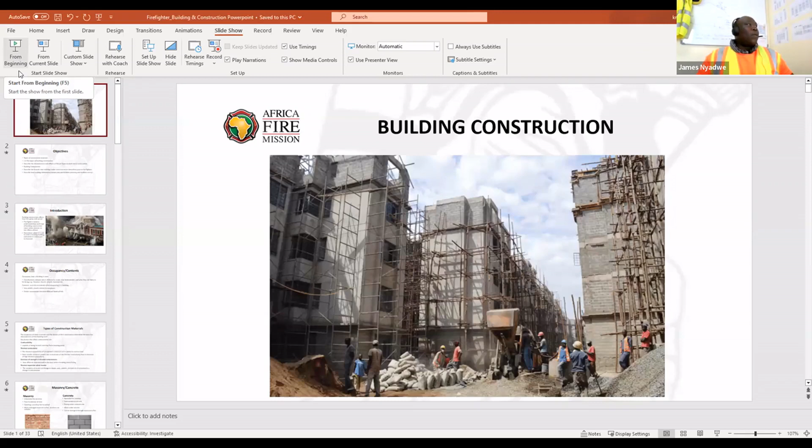Now it's a bit of a stretched out one, but we'll just work on it slow and go through it. If you have any questions, please wait till the end, then you can ask, but I'll try and run through it as efficiently as I can.

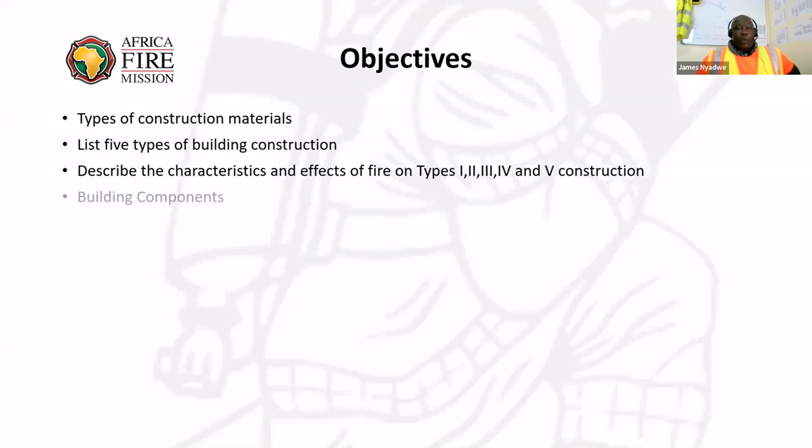So we're talking about building construction in relation to the fire service. We're going to look at types of construction materials, the 5 types of building construction, and describe the effects of fire on each of these 5 types. We'll look at building components and how they affect us as firefighters, describe the hazards that buildings under construction or demolition can pose to firefighters, and then look at how building construction factors into pre-incident planning and incident size-up. So here we go.

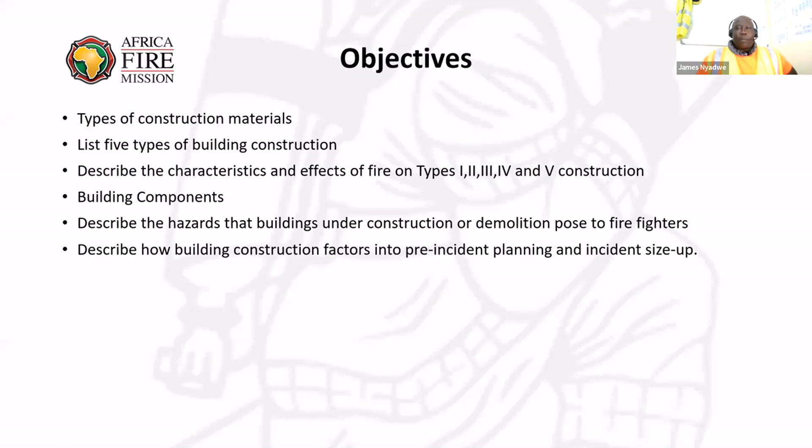So we look at a couple of things, starting with occupancy. Occupancy means how the building is used - it may be classified as a hospital, a church, a school, a factory, etc. That gives you an estimate of the number of people in there. If it's a hospital, you'd know there's a lot more people. If it's a church, depending on the day, you'd have a certain number of people. This should also be considered when responding to a fire.

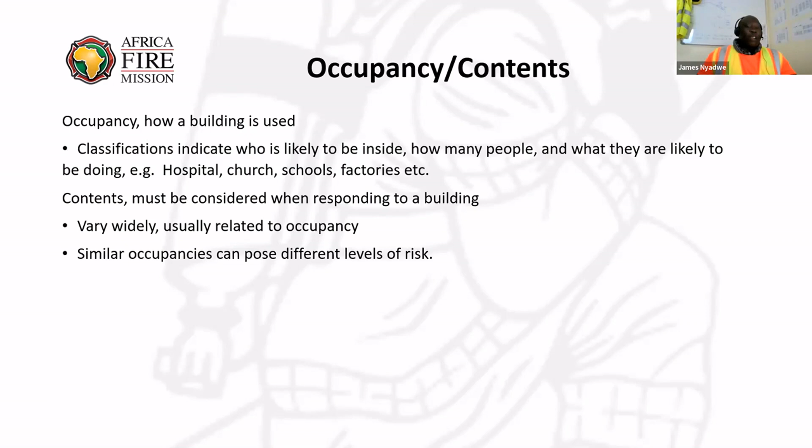The contents also relate to the classification. If it's a hospital, you'll have oxygen tanks, beds, a dining area, and other things. If it's a school, you'll have desks. If it's a factory, you'll have heavy machinery. This is very relevant to us when going to a fire - it's good to know the occupancy classification so we come prepared, and it might help in selecting what tools you need for the task ahead. Similar occupancies can also pose different levels of risk, and we'll look at that as we go through the presentation.

So then, types of construction materials. These materials determine the basic fire characteristics of the building itself. Some of the things we're going to look at: combustibility, which pretty much means the capability of being burned - how fast does it catch fire and how easily does it burn.

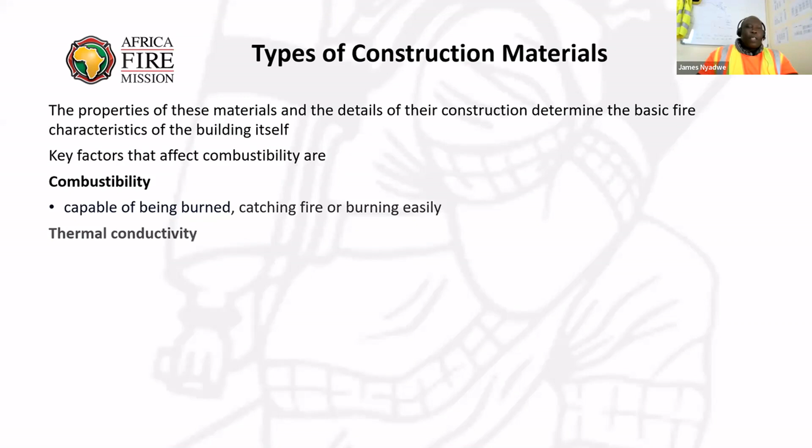Then there's thermal conductivity - this is a measure of the material's ability to conduct heat. Heat transfer occurs at a lower rate in materials of low thermal conductivity than in materials of higher thermal conductivity. Those are just some terms there, but we'll discuss more of them as we go through the presentation.

So, decrease of strength at elevated temperatures - this talks about how different materials will hold up in heat before breaking down or failing. This is important because if it's a roof, a door, or a wall, it gives us a rough idea of how much time we have in that area before we need to evacuate.

Then thermal expansion when heated - this is the tendency of matter to change its shape, area, volume, or density in response to a change in temperature. If the fire is really hot, we may have a problem in that area. So all these things are just a few things we should know about construction materials.

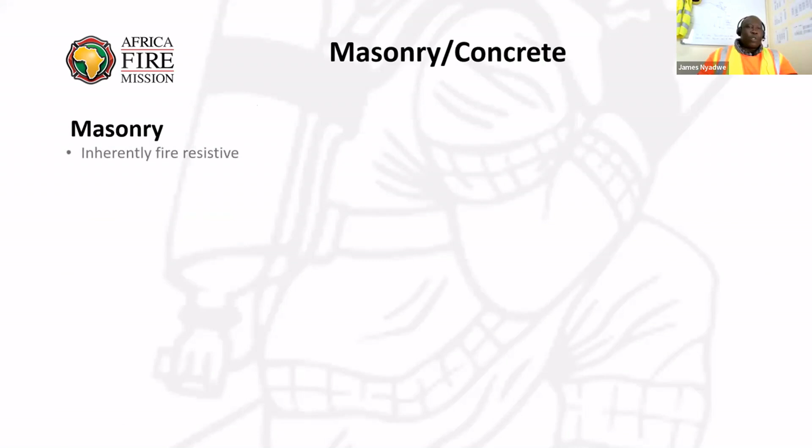So let's look at the different ones we have. We'll look at masonry versus concrete and do some comparisons. Masonry is inherently fire resistive - that means it doesn't burn that easily.

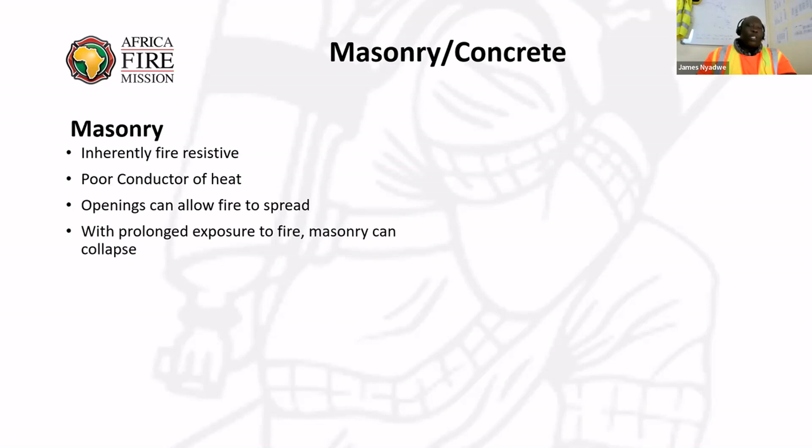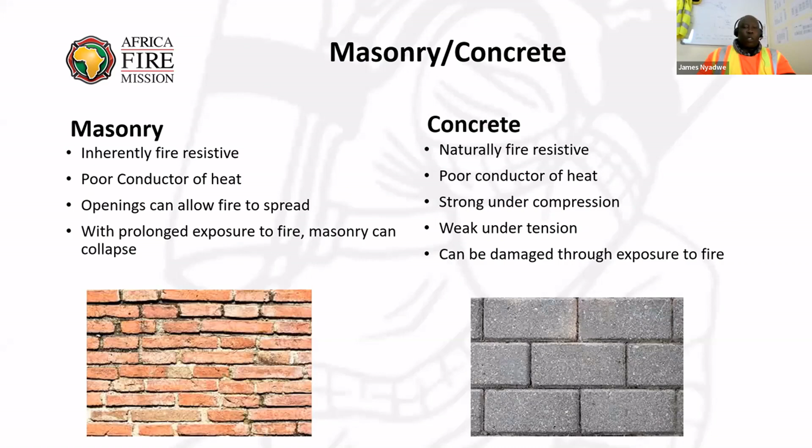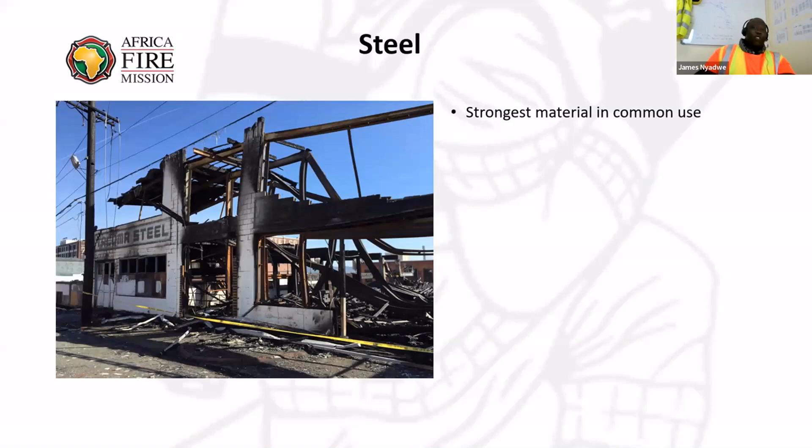So moving along, we go to steel. As you can see from the picture, the steel will bend. It's the strongest material in common use out there, strong in both compression and tension. It will rust if exposed to air and moisture, like out here where I am. There's a big problem with rust, so a lot of things get to rust. Vehicles will rust, pieces of equipment will rust if they're left out.

Not fire resistive, that means it will burn. It's a very good conductor of heat, meaning the steel can transfer heat from one area to a different area of the building that is not burning. It expands and loses its strength when heated. Any sign of bending, sagging, or stretching indicates immediate risk of failure. So if you're in a fire in a building that had a lot of steel structures, and you see it starting to sag or bend, then you know chances are it's about to go, or it's in the process of failing.

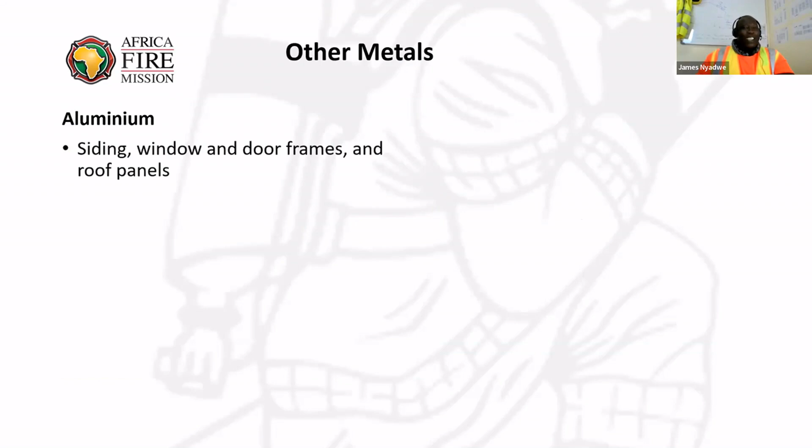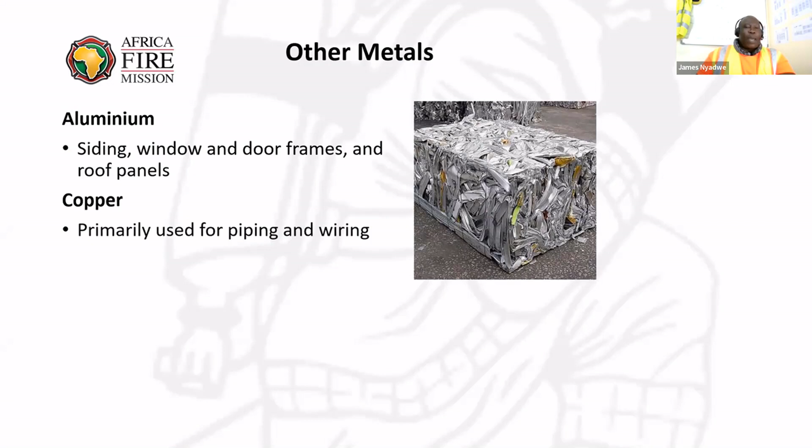So other metals that we have: aluminum. Our American friends will say aluminum, but for today in Africa, we'll say aluminium. This could be like siding for windows, door frames, roof panels, and just generally a pile of scrap aluminum. Copper is also used a lot for piping and wiring. And then we have zinc, used as a protective coating for metals, like on taps and other fittings, you'll have zinc on there. So these are some of the other metals you'll have in our regular building constructions.

So we look at glass and gypsum board. All right, so we'll start with glass: non-combustible, but not fire resistive. If it's ordinary, untreated glass, it will break when exposed to a flame. So that's all there is pretty much to do with glass, not too much more we can go into that.

But gypsum board is a good insulator with limited combustibility. If it's got paper in it, it will burn, but the gypsum board itself will not. So it's often used in some buildings or constructions as a fire stop, but prolonged exposure to fire will cause failure. So none of these items we've talked about are really 100% fireproof.

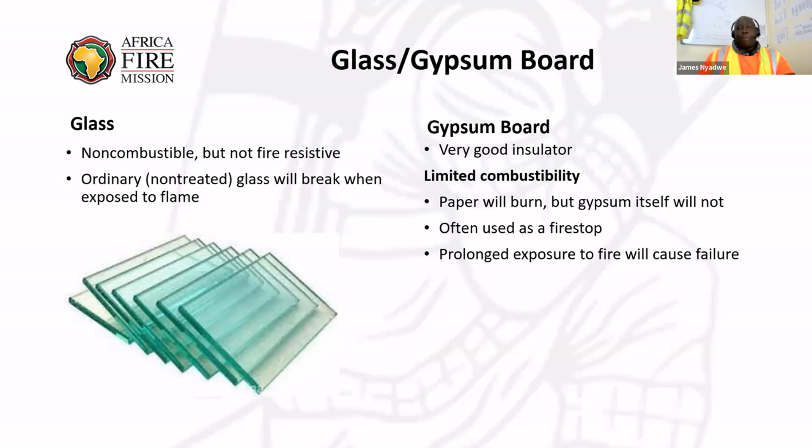At certain points they may fail, right? So you might ask yourself, what's a fire stop? A fire stop is something that is designed to maintain the fire resistance rating of a wall or floor assembly, something designed to impede the spread of fire or smoke. So it kind of slows it down. As you see down there with the gypsum board, we have the normal one, the fireproof board, moisture proof, and waterproof. So they come in different styles or types.

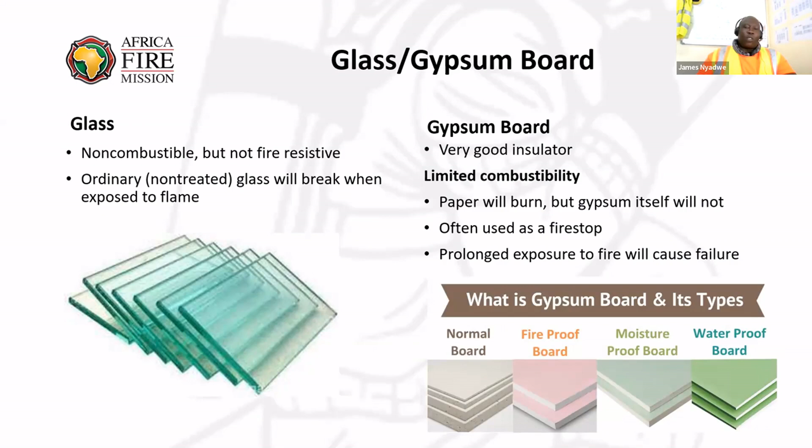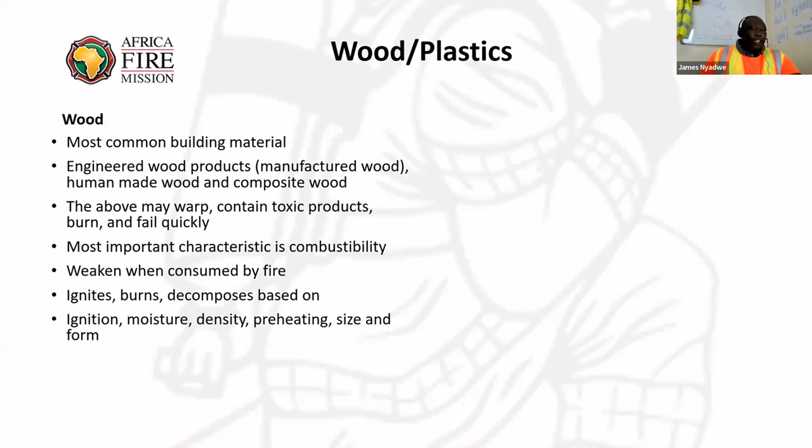Wood and plastics. Wood is very common the world over. It could be manufactured wood, human-made wood, or composite wood. It may warp, it may contain toxic products, and it burns and fails really quickly. The most important characteristic is combustibility, weakened when consumed by fire. So it ignites, burns, and decomposes based on moisture, density, preheating, size, or form. High temperatures decrease strength via pyrolysis.

Pyrolysis is wood that is subjected to rapid thermal decomposition in the absence of oxygen. That's what that term means. So then we look at plastics. They're rarely used for structural support. Combustibility varies depending on the type, but most plastics will release dense or toxic smoke when they burn. We have different kinds, called thermoplastic materials, which will melt or drip. Thermoplastic materials means these ones can be softened through heating before being processed, then left to cool and harden.

So that's what we call thermoplastics. Once cooled, they show no changes in their chemical properties, meaning they can be remelted and reused several times.

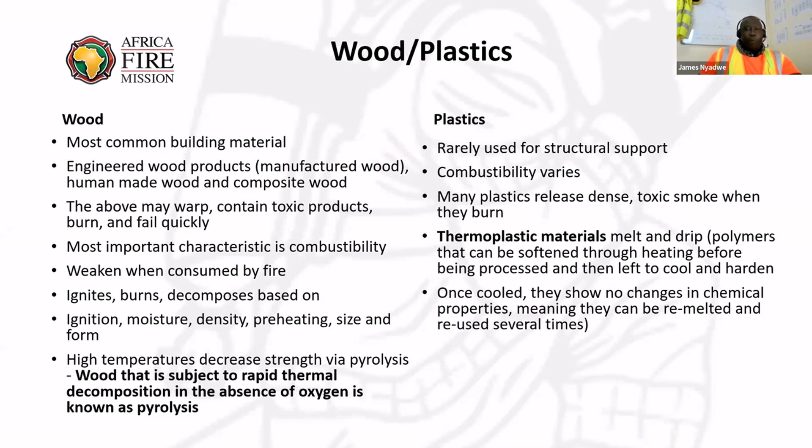So that's thermoplastics. Thermoset materials, those ones lose strength—they will not melt. They are synthetic materials that strengthen when heated. So once they're heated, you cannot remold it again, or reheat it and transform it again. So those are the two different kinds of plastic that we'd have.

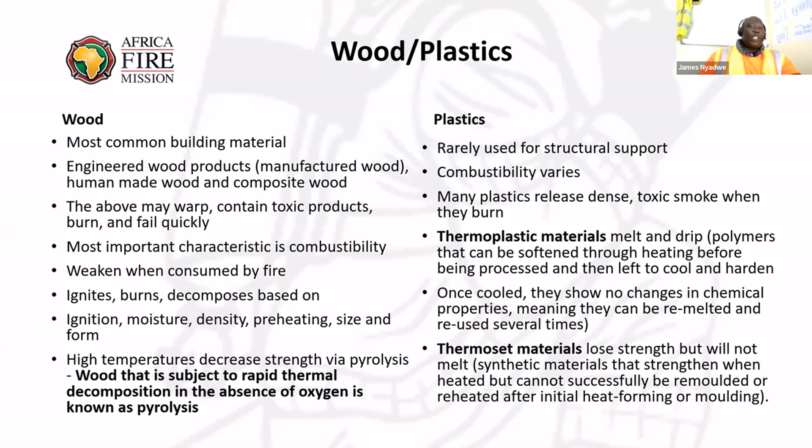And some of the newer building materials would have these as part of the components of our building. So now let's look at the 5 types of construction.

Now, for me, this was quite a surprise because I didn't actually realize there were different types of construction. I always say a house was a house, a building is a building, but I guess you always learn something new. So there's type 1.

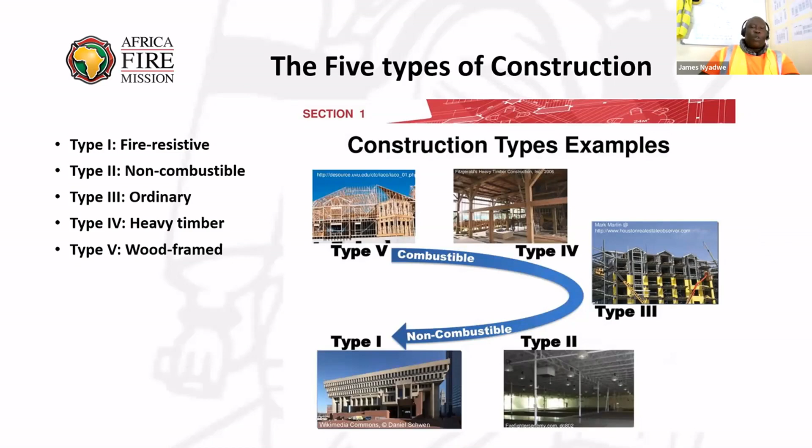So there are 5 types. Type 1 is fire resistive. Type 2, non-combustible. Type 3 is ordinary. Type 4 is heavy timber. Type 5 is wood framed. We're going to look at each one and see what their characteristics are, going from type 1 through to type 5.

So type 1, fire resistive. If a building is rated as type 1 fire resistive, then all the structural components in it must be non-combustible. That means they cannot burn easily.

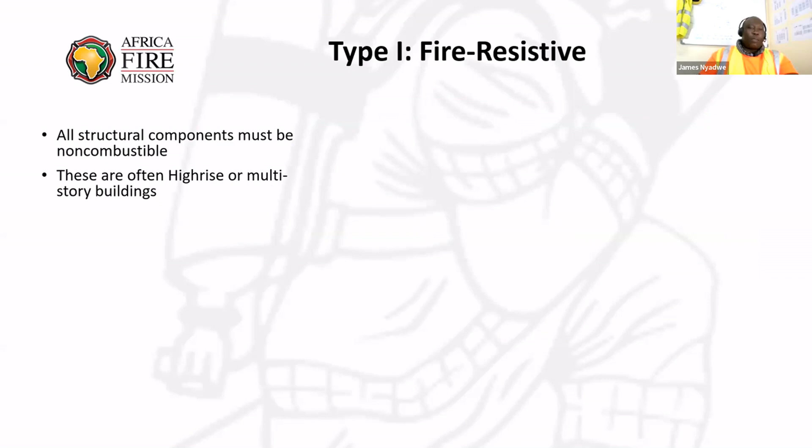They're often used for high-rise buildings or multi-storied buildings, and they should be able to withstand fire for between 2 to 4 hours. That at least gives you some time to get in there, evacuate, or attack the fire before it actually starts to break down.

The building materials should not provide fuel for a fire, because imagine if it was a high-rise or multi-storied building and all the materials provided fuel—the structure would fail very quickly. If it has steel framing, it must be protected. And fires of this type can be very hot and extremely hard to ventilate.

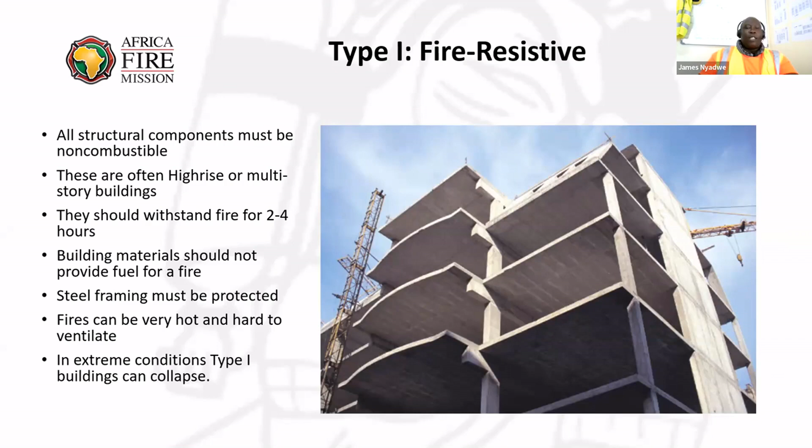So that's just an example of a high-rise building, and you see it's mostly a lot of concrete, so that doesn't burn easily—that's fire resistive type 1. Also, in extreme conditions, this kind of building may collapse, and we've seen it happen in different parts of the world. Really strong building, but because of excessive heat or extreme conditions, the building will collapse. So that's something also to keep in mind.

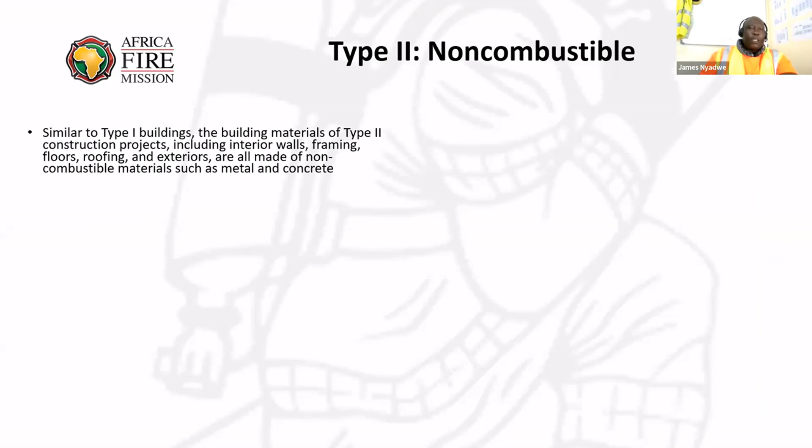So we look at type 2, non-combustible. Similar to type 1, but the building materials of type 2, including interior walls, framing, and roof, are all made up of non-combustible materials such as metal or concrete. Now, although these materials are labeled as non-combustible, they offer less protection than type 1.

So type 1 would be the cream. If we're looking at vehicles, if type 1 was the Mercedes, then this one is our second level. They're usually not coated in fire resistant materials, so a spreading fire would likely do more damage. Buildings that fall into this type 2 category would be shopping malls, newer schools, and big box stores like Naivas, Nakumatt, or Tuskys.

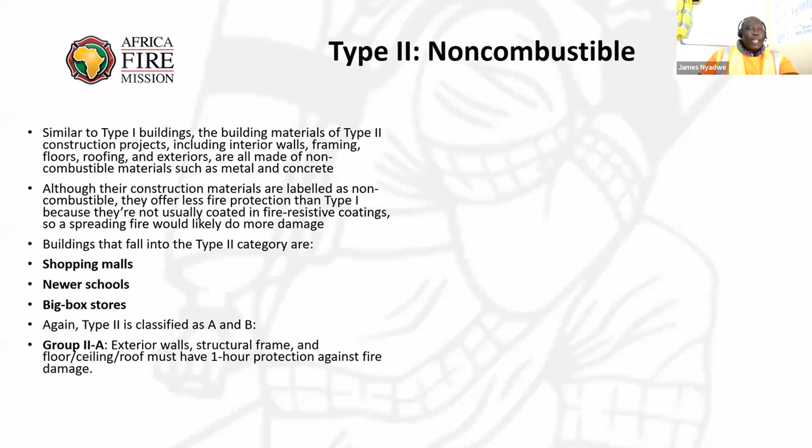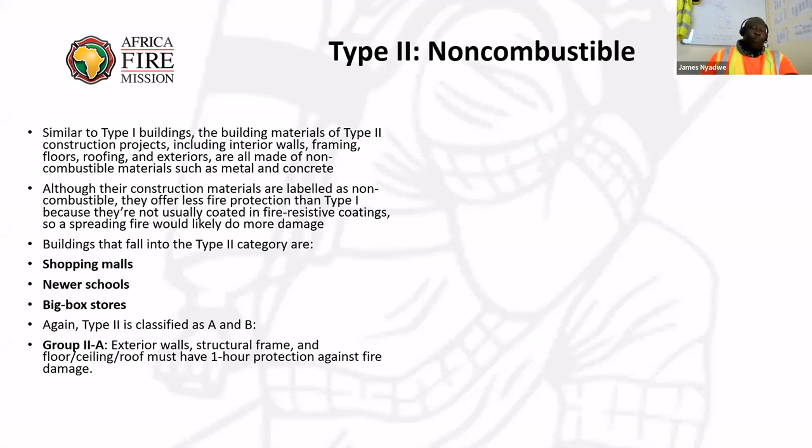But remember, this type 2 has 2 classifications, A and B. In type 2A, the exterior walls, structural frame, floor, ceiling, and roof must have at least 1 hour protection against fire damage—enough to get people out and give us a little edge over the fire.

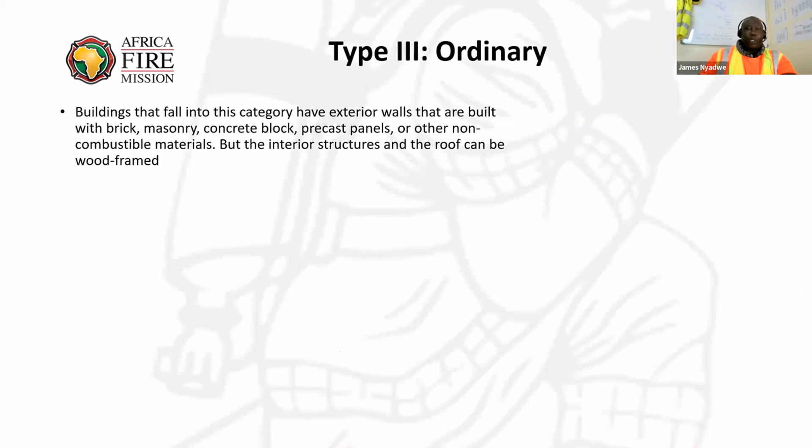So moving on to type 3, ordinary. Buildings that fall into this category have walls built with brick, masonry, concrete block, precast panels, or other non-combustible materials, but the interior structures can also be wood framed. The main goal of type 3 is, in case of fire, to contain it within the exterior walls of the building and prevent it from spreading to nearby buildings.

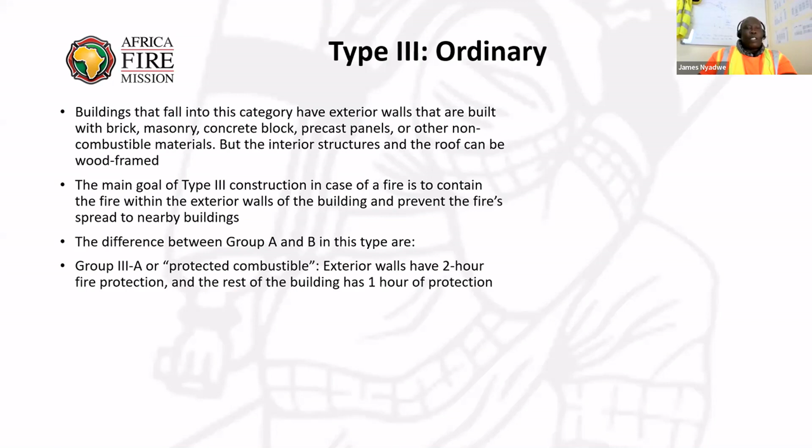Again, this one has 2 groups, A and B. In type 3A, protected combustible, the exterior walls have 2 hour fire protection, and the rest of the building has 1 hour protection.

Type B, the exterior walls have 2 hour protection, and the rest of the building has very little resistance.

The construction options for this type of building, type 3, are more varied than type 1 and 2. But then again, you still have less fire protection. So it's up to us as firefighters to know the kind of buildings we have in our city or in our towns. That way it prepares us, even mentally, about what to expect when you go to fight a fire in this sort of structure.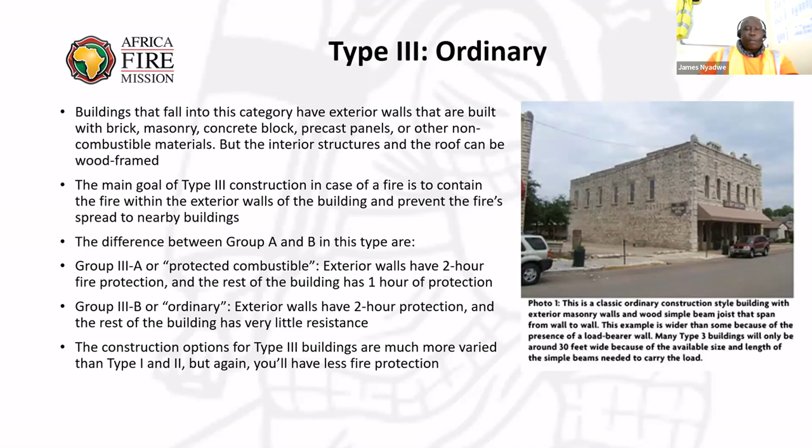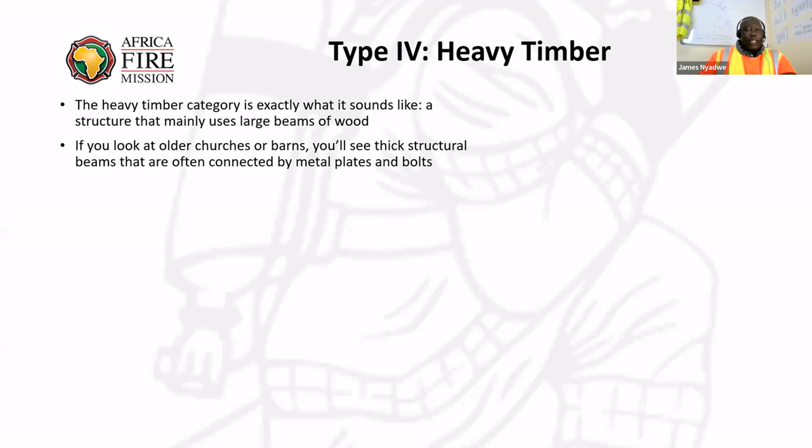So let's look at type 4, heavy timber or heavy lumber, as they would say in other countries. So this is a building that mainly uses large beams of wood. Different countries have log cabins - Canada, America, certain parts of the world - made entirely of big trunks of trees. Now if you look at older buildings, barns or churches, you might see the big structural beams in there, and they're usually connected by metal plates, or they have thick bolts that go through. The columns, beams, or girders will also be at least 8 inches thick to support the building's loads. And heavy planks for the roof and floors might at least be 6 inches thick.

So these type 4 buildings also have non-combustible exterior walls and interior elements, but they're not divided into A and B like the type 3s.

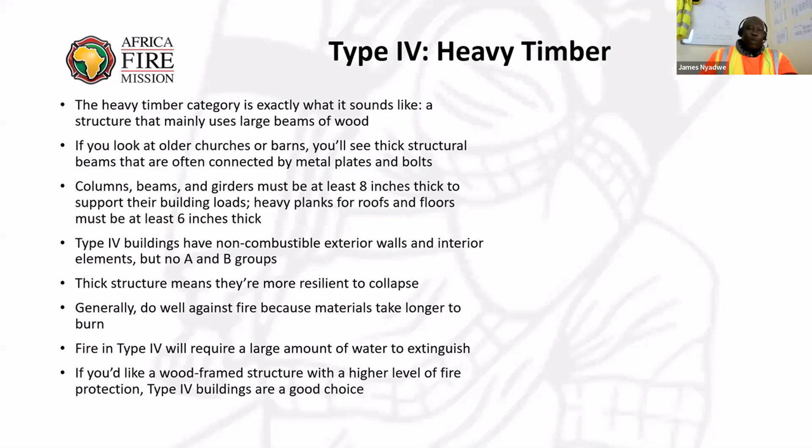Thick structure means they're more resilient to collapse, means they're more steady. But again, they do well against fire, because the materials take longer to burn - it's like trying to burn a whole tree trunk, it takes a while before it catches fire. But again, you will need a large amount of water to extinguish that fire. So it's just good to know what you have in your area. Like we always say, be prepared, and then you won't be too surprised when you get called out to an incident or to a fire.

So this type of building is becoming popular now, because a lot of people love the natural style of buildings. A lot of people are going back to building with wood or lumber, heavy timber for their buildings. Makes it look nice, makes it look like a greenhouse sort of thing. So you'll see a lot more of that coming through.

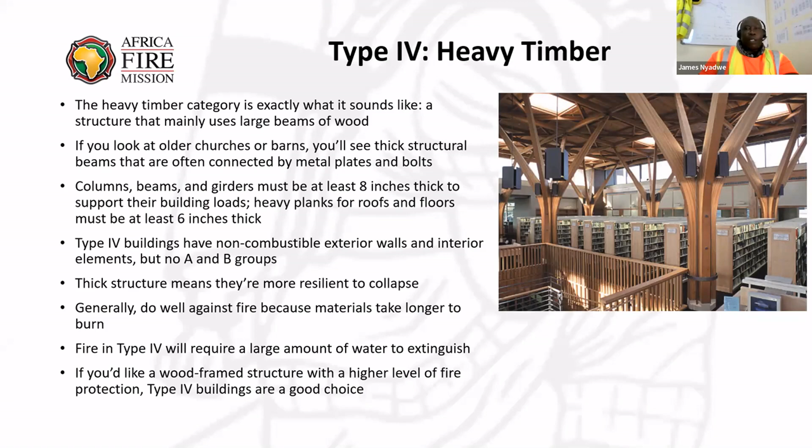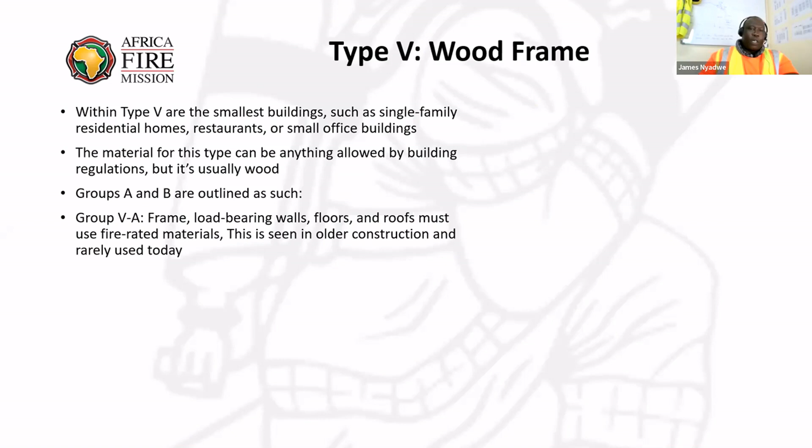Then we look at type 5, wood frames. They're the smallest buildings, such as single family residential homes, restaurants, or even small office buildings. The material for this type can be anything allowed by building regulations, but it's usually wood. This one also has 2 groups, A and B. Group 5A is a frame - load-bearing floors, walls, and roofs must use fire-rated materials. This is seen in older construction, but it's rarely done today. And type B of this building has no required fire resistance rating for any of the building elements.

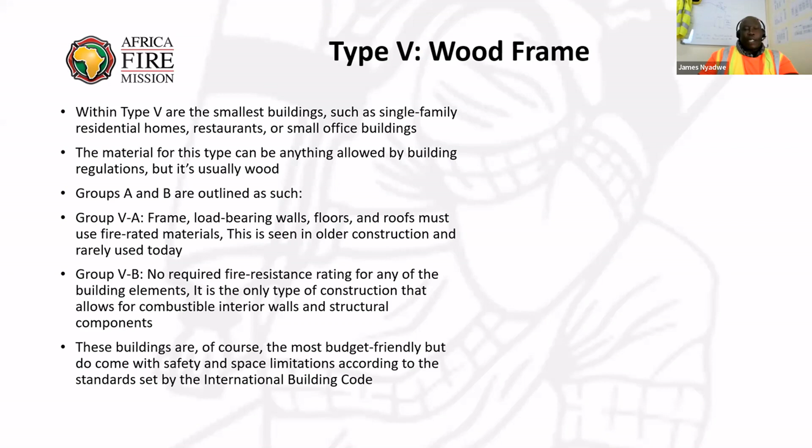It's the only type of construction that allows for combustible interior walls and structural components. Again, these buildings are most budget friendly, but they do come with safety and space limitations, according to the standards set by the International Building Code. So as you see, they're easy to make, they're affordable, but in a fire it would be very easy for it to collapse, because these are what you'd find in a lot of informal settlements, a lot of the wood structures you'd find there. So that's again just something for us to note.

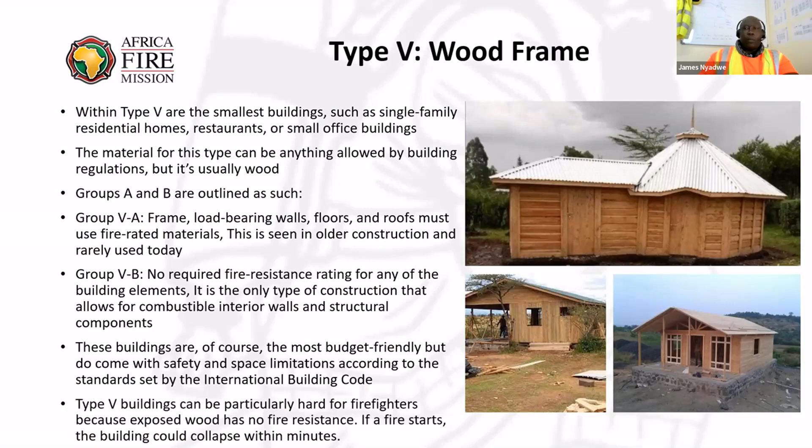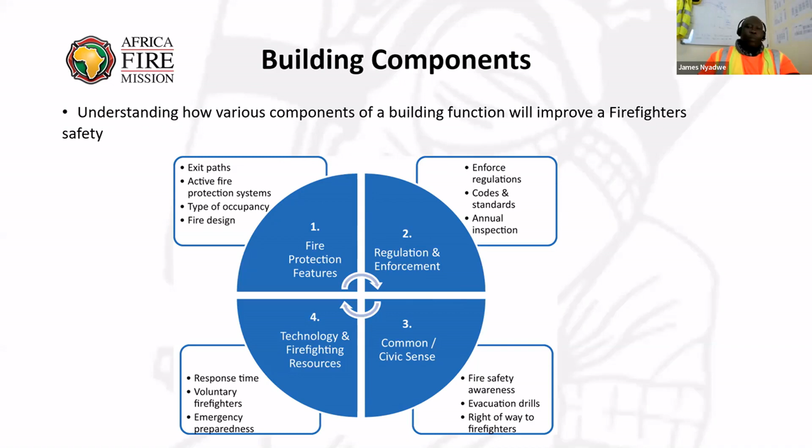Because if you went to a building that had a fire and everybody knew to evacuate and shut the doors based on what you've told them, it would help you when you arrive. By the time you get there, they tell you we've already evacuated the building, everybody's accounted for, we've shut all the doors, we've done A, B, C, D. It does make your work easier. So that's just something we can think about as we go forward.

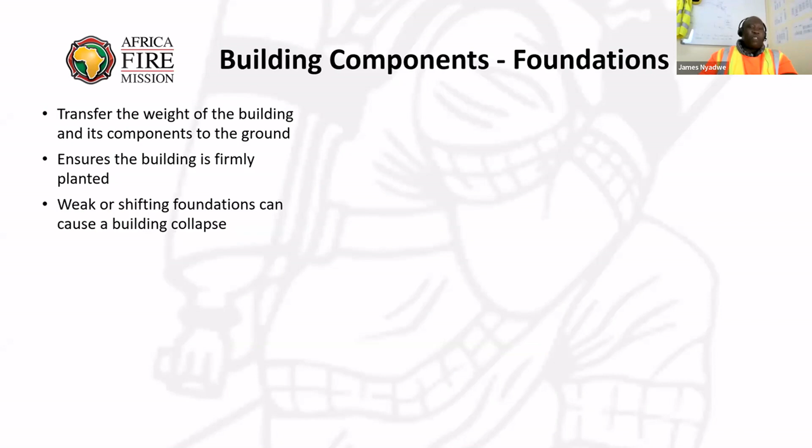So let's look at foundations. Foundations transfer the weight of the building and its components to the ground, ensuring the building is firmly planted. We all know a weak or shifting foundation can cause a building collapse, and unfortunately many firefighters have been killed as a result of this happening.

So we need to understand the buildings in which we fight our fires. The knowledge of building construction starts with understanding the loads, forces and the materials. As you look at a building while driving down your daily commute, coming from home, look around and see what's going on around you, because this early detection is also very good.

As it shows there, we have different pictures of people doing construction, and also as a result of foundations collapsing. This becomes a really difficult situation for any firefighter, and you really don't want to be in a situation like that.

So we become part of the solution, not part of the problem. We help the public understand why they need to do certain things. But then again, that all doesn't fall on us - there are different government agencies also tasked with doing the same things and making sure things are being done up to code. But that's a story for another day.

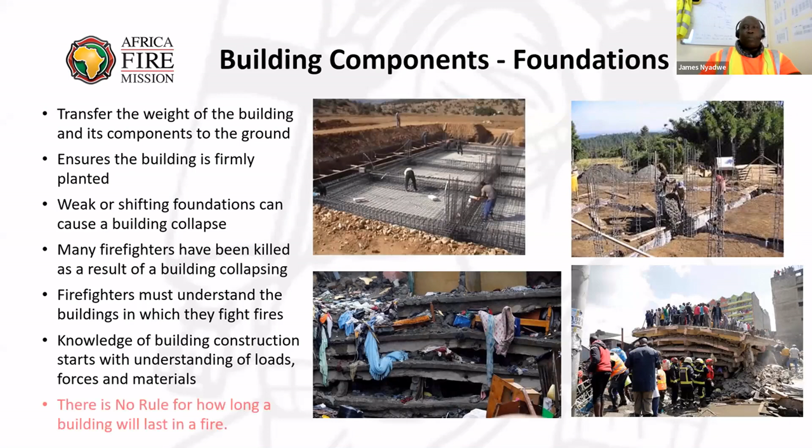So we look at wood supported floors. Heavy timber floors can contain a fire for an hour or more. Conventional wood flooring burns readily - pretty much like a matchstick - and can fail in as little as 20 minutes. In our informal settlements, this is the situation we might be dealing with, the conventional wooden flooring. There's also modern lightweight wood I-beams and trusses.

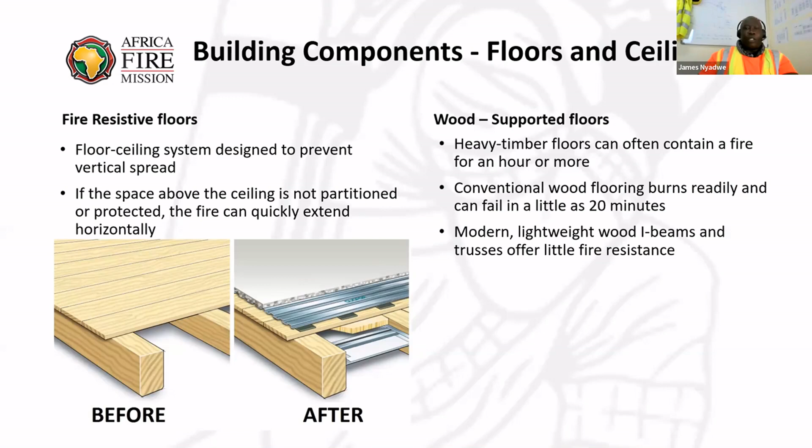There are 3 designs we'll look at for this purpose. We have pitched roofs, curved roofs, and flat roofs. So you have your flat roof, your pitched roof, and your curved roof. Those are the different types of roofs we have, and they behave very differently in fires.

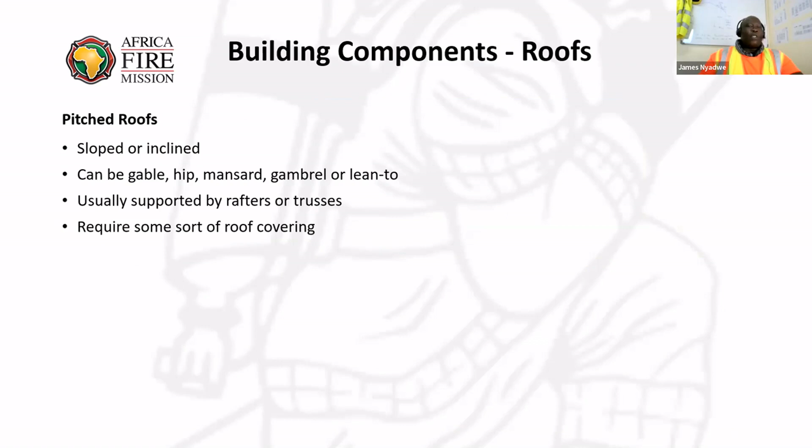Pitched roofs may be sloped or inclined. They can be gable, hip, or different styles - those are pretty much the different names for styles of pitched roofs. They're usually supported by rafters or trusses, and require some sort of roof covering like iron sheets, tiles, etc.

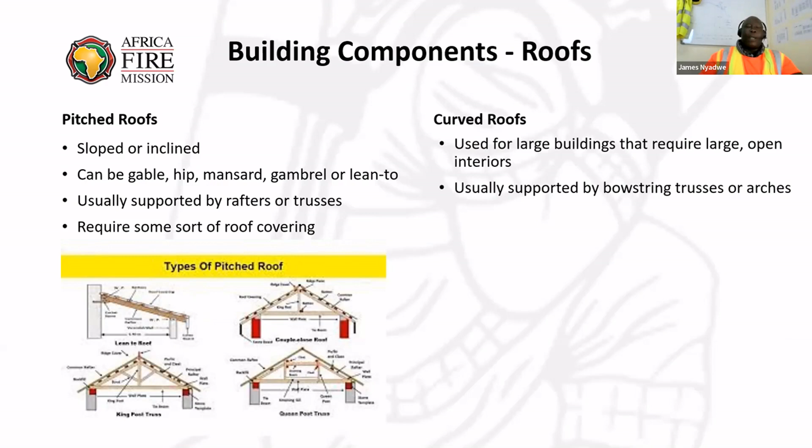Curved roofs are used for large buildings that require large open interiors - warehouses, factories, automotive showrooms, things like that. So that's your curved roof. And then on the other side, we have pitched roofs, like residential houses and that sort of thing.

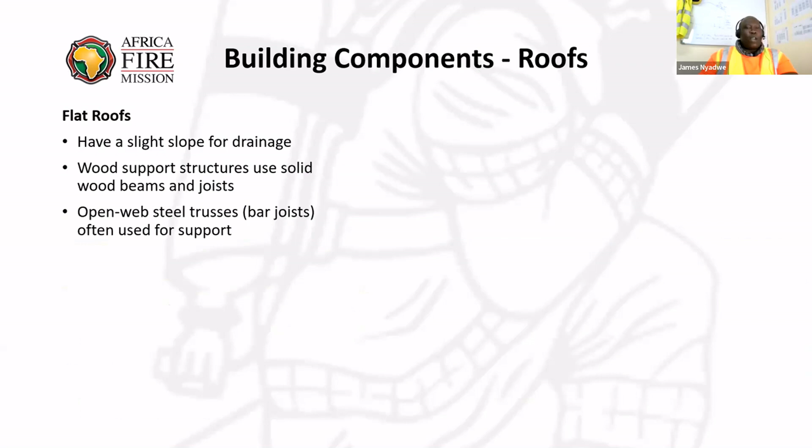Still on roofs - flat roofs will have a slight slope for drainage. Wood support structures are solid, with wood beams or joists. If they have open web steel trusses, these are often used for support. And most of the covering is highly combustible. So that would be a flat roof.

Ventilation may involve cutting through many layers of roofing to ventilate the fire. So as we said before, the truss is the framework that supports something like the roof - even a bridge's framework is called a truss. It could be a steel beam, a wooden beam, that sort of thing, but they call it a truss.

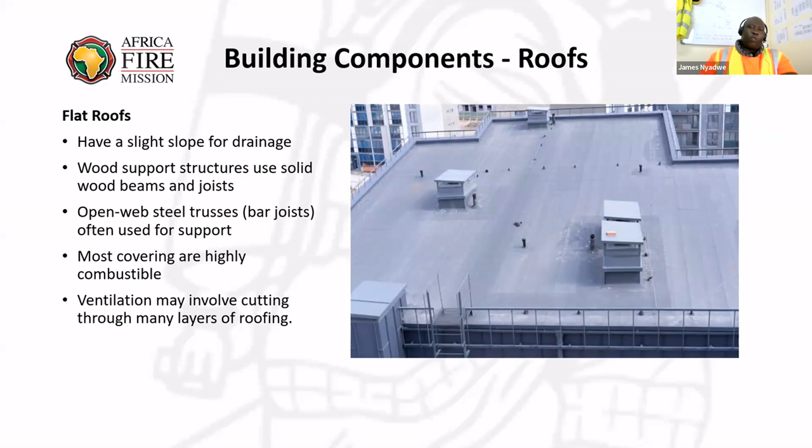So look at our trusses. Triangular geometry creates a strong, rigid structure, usually prefabricated wood or steel. They fall into three types - I just picked these three, but there are a lot more different styles. There's the parallel chord, the pitched chord, and the bowstring.

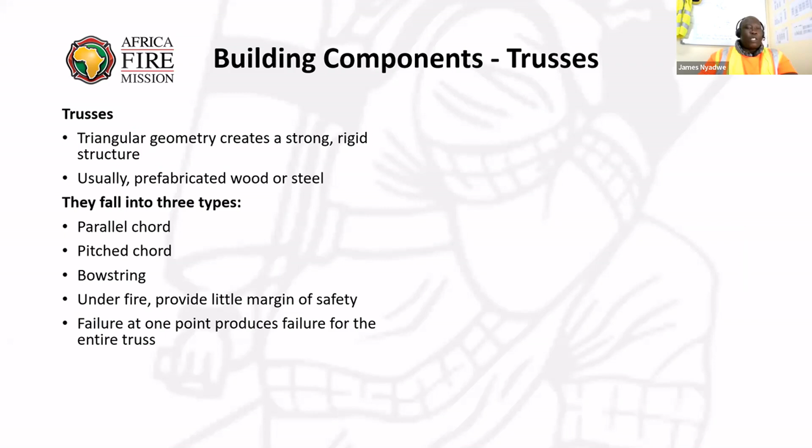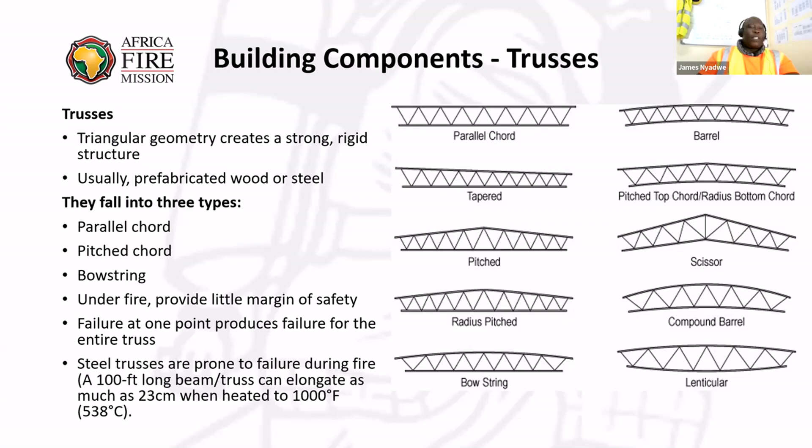Now, steel trusses are prone to failure during fire. So if it's, for example, a 100-foot beam truss, it can elongate or stretch as much as 23 centimeters when heated to 1,000 degrees Fahrenheit, which is 538 degrees Celsius. In some fires, it may well exceed that amount of temperature. So this could happen, right? We always have to be prepared for the inevitable.

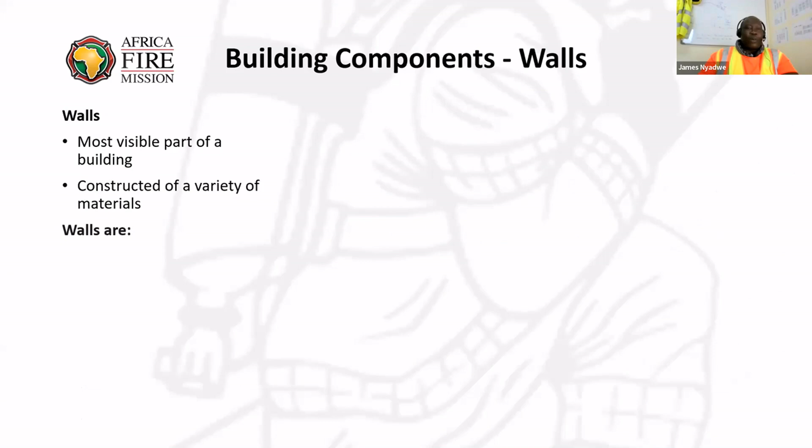So now we look at walls. They're the most visible part of a building, constructed of a variety of materials. Walls can be load-bearing or non-bearing, and we'll look at the difference between load-bearing and non-bearing walls. They could also be specialized.

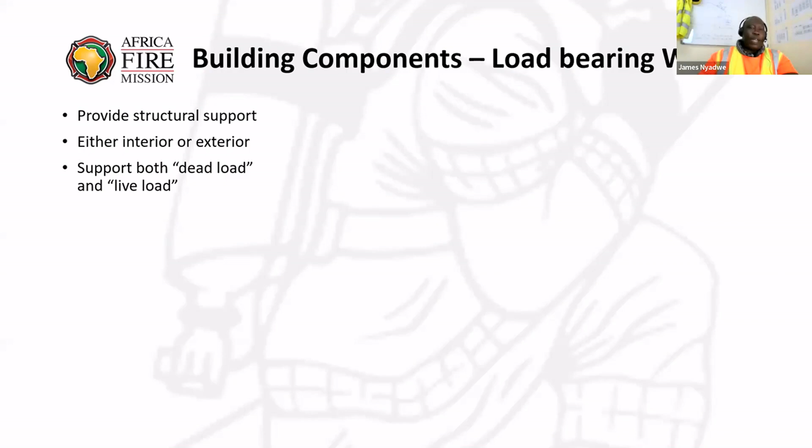So a damaged wall can result in collapse. If any of the sides - the exterior walls or the interior one that's holding the roof - collapses, then it may lead to collapse of the structure. So that is a load-bearing wall.

Now I'll put them side by side so we can see them.

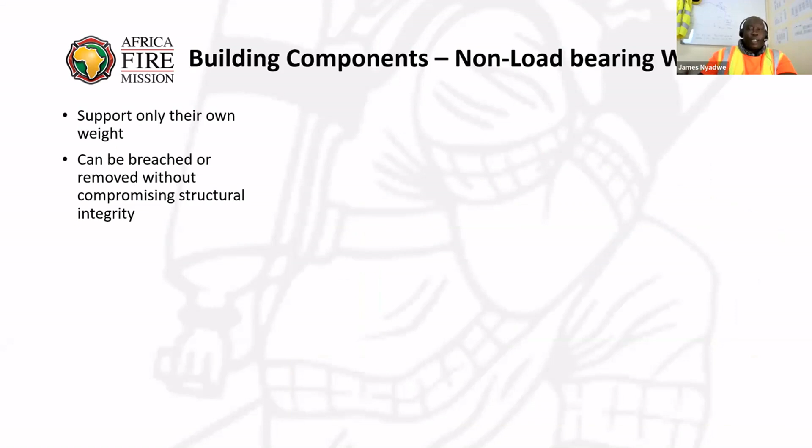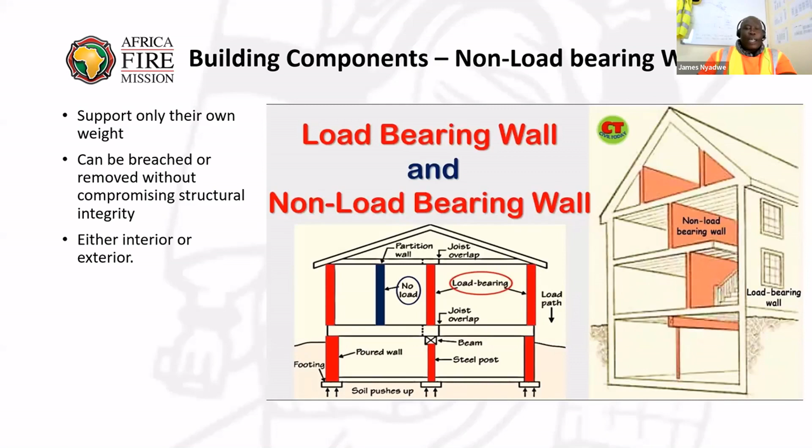Then we have specialized walls, what they call party walls. Now this doesn't mean that if you're having a party, you put up a party wall—that's not what it means. It's a common wall to two properties. Some types of buildings share one wall, so you have a neighbor on this side and another on the other side, but you have separate roofs.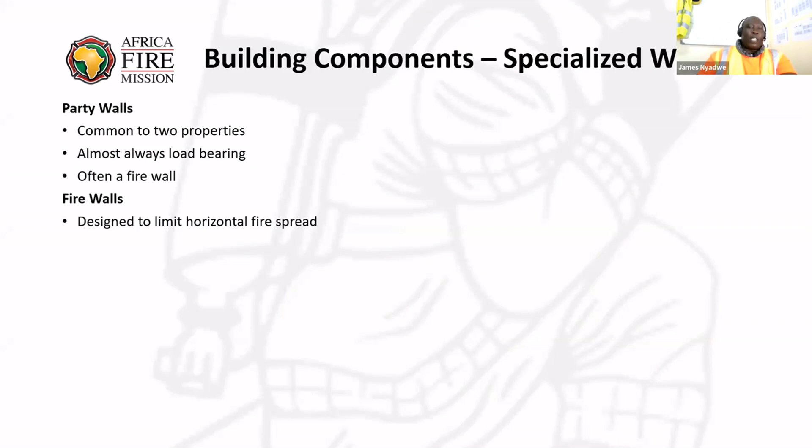They're almost always load bearing, these party walls, and often they'll be a firewall. So what do firewalls do? They're designed to limit horizontal fire spread. They extend from the foundation through to the roof, and they're constructed of fire-resistant materials.

Then we have fire partitions. All of these fall under the specialized walls category, so to speak—party walls, firewalls, and fire partitions. Fire partitions are interior walls that extend from the floor to the underside of the floor above. Then you also have fire enclosures, which are fire-rated assemblies for vertical openings. Then there are curtain walls, which are non-bearing exterior walls attached to the outside of a building.

Now some of these specialized walls, most airports now have them. So if there's a fire in one section of the airport, they can shut these walls and contain the fire to that particular section, so it doesn't spread, or it takes much longer to spread. Others will have things like fire doors and stuff, which we'll come to shortly.

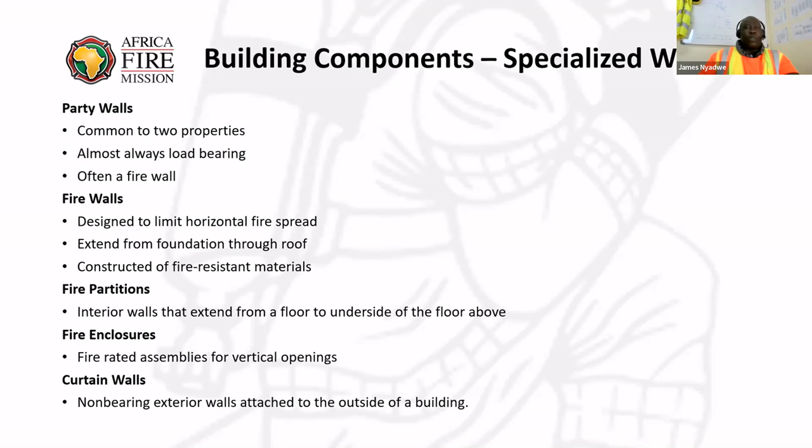So doors, windows, fire doors, and fire windows. Doors, we use them every day: entry, exit, light, and also ventilation. They could be constructed of wood, metal, or a mixture of the two. Hollow core wood doors have little fire resistance, or offer very little fire resistance. Solid doors provide more fire resistance. Solid core doors, like the older style doors, are very good in fires. Metal doors are more durable and fire resistant.

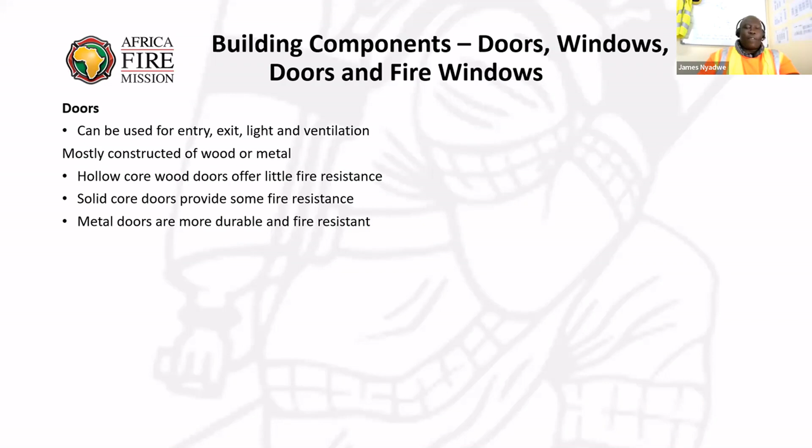Then we look at window assemblies, again used for light, ventilation, entry, and exit. The window type will depend on a variety of factors: your budget, the type of building, the design, the size, and the materials you're using.

Then fire doors and fire windows, like we talked about, are constructed to prevent the spread of flames, heat, or smoke. They must meet a standard—in the US it's the NFPA 80, or in Kenya or other countries, relevant country codes govern the manufacture or construction of these fire doors and windows. A lot of new high-rise buildings now have fire doors and fire windows. The fire door might have a small fire window so you can observe what's happening on the other side. They must be labeled accordingly, because there's no point having a fire door if nobody knows it's a fire door—it won't serve its purpose at all.

Fire windows are used when a window is needed in a required fire resistant wall, so it allows you to observe what's going on. These are some of the features that can be added to a building to make it safer for us as firefighters, safer also for the occupants, giving them at least some time to evacuate the building.

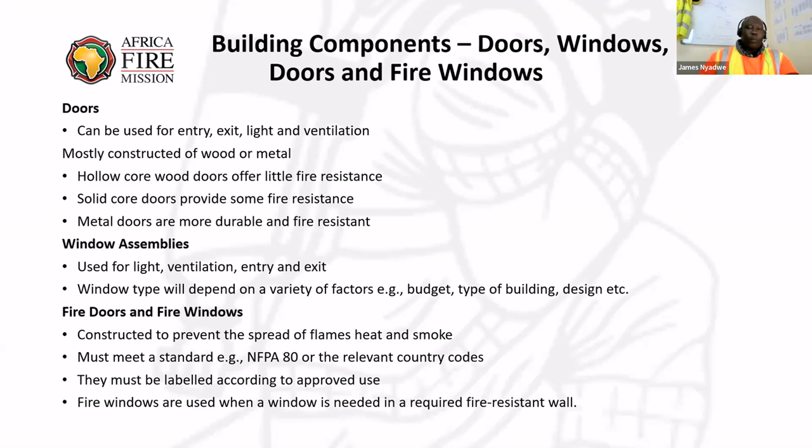So we're going to look at some of the interior finishes, things like manufactured housing, buildings under construction or demolition, because all of this puts us at risk if we're not aware of the materials or components there. Finishings and coverings are the exposed interior surfaces of a building.

We should know the hazard posed by different interior finishes. Some are made from plastic, some from petroleum products. Why is this important? Because if it's plastic, we're talking about toxic smoke. If it's petroleum, we're looking at different hazards and carcinogens that may be derived when these materials burn. And remember, we're inhaling it, and we've talked about cancer. So we need to be very careful when we go into such buildings.

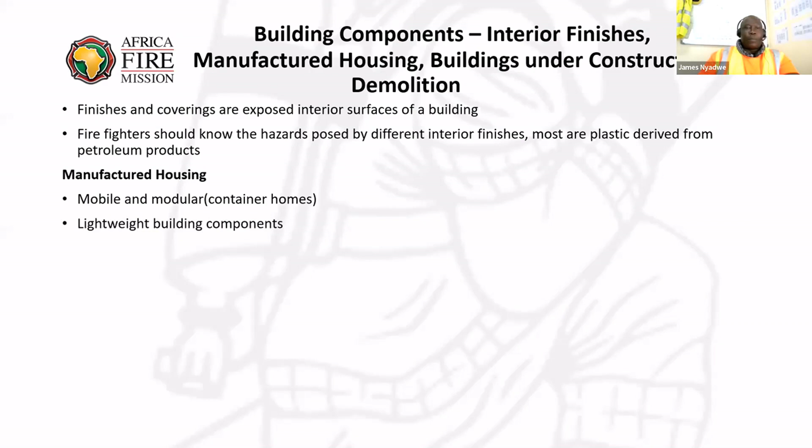Now, manufactured housing is a newer style coming in. In other countries it's been there forever, but as mobile or modular housing, or what they'd call container homes. They're made of lightweight building components, and most of these components are unfortunately combustible. So the death rate in mobile home fires is three times that of other single family home fires, because it burns extremely fast.

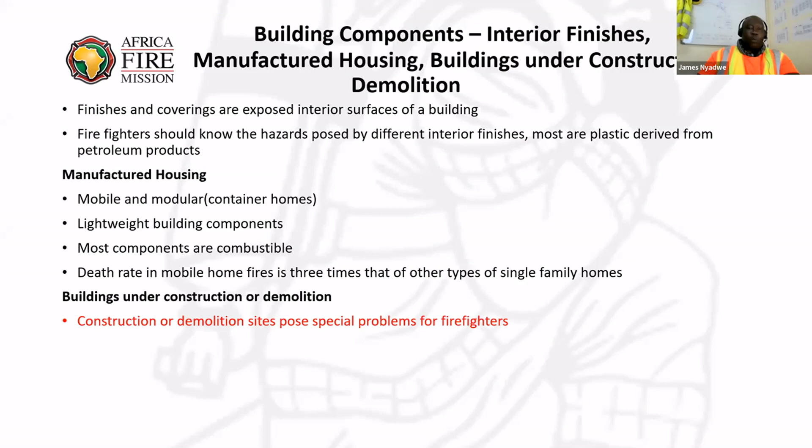Buildings that are under construction or demolition can be a special problem for firefighters. So if a building is under construction or demolition, we always have to be extra careful. For example, if it's construction and it starts leaning, and you're called there to check it out, always be extra careful. Observe the building before even trying to enter it, and if you can observe it from a distance, even better.

If a building is going under demolition, they may have taken off some of the load-bearing walls, which can lead to an imminent collapse. Normally in such buildings, the built-in fire protection features are often missing or already taken out. Fire resistive enclosures, if they had any of that material, it's already been removed. And often these buildings have been unoccupied for long periods, so people may have dumped trash in there, which becomes fuel for the building when it's burning. That's something we have to look out for and take care of.

So, pre-incident planning and incident size-up. We talked about this last week, but it's still very important because it's part of what we need to do as a fire department to prepare us for the work ahead.

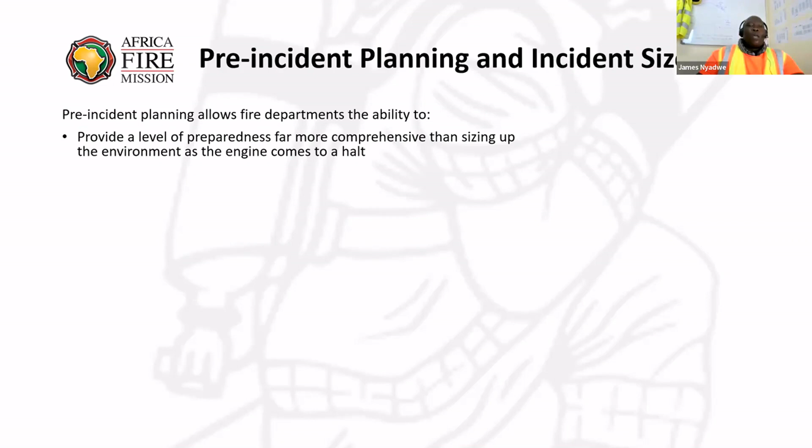So what does this mean in terms of building construction? How does pre-incident planning and incident size-up relate? First of all, it provides a level of preparedness far more comprehensive than sizing up the environment as the engine comes to a halt. We've done it in advance, so even as you're approaching during a fire, it gives us the added advantage that we've already looked at this type of structure and have an idea of what to expect.

Another thing: a proper, documented, and updated pre-incident plan gives the incident commander everything they need to know in the first five minutes on the scene. The quicker you attack the fire, the better, but this can only be done if you've already pre-planned. If you haven't, you'll take more time to gather the information you need and figure out which way to go.

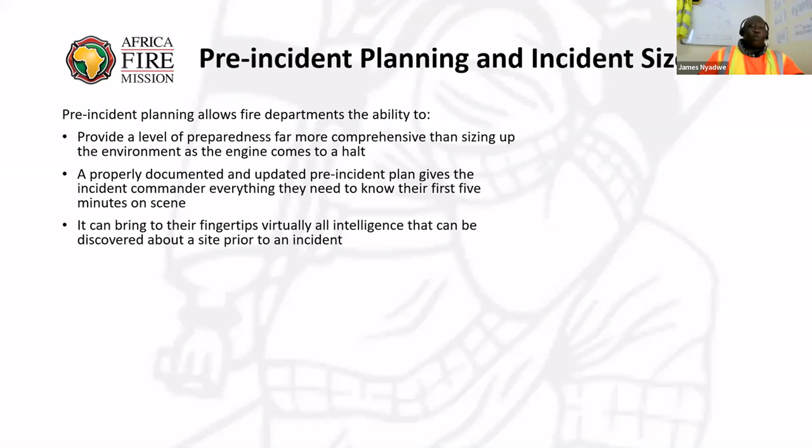It can also bring to your fingertips virtually all the intelligence that can be discovered about a site prior to an incident, because you've checked it out. So you have an idea where the exits are, that a window is probably blocked, and all that good stuff. It's worth investing the time and effort into pre-planning, because the benefit in terms of safety and saving time will be huge—it can come back tenfold. We'll actually benefit more from being proactive rather than reactive.

It also enables you, as a department or as firefighters, to train more effectively and shed light on the vulnerabilities you need to fix—maybe you need ladders, more tools, window-breaking tools, or anything else. You'd only discover these needs through training. So as you train in your pre-planning, you become very well prepared.

We also learn the general characteristics of the building types in your area. Know what you have, know what type of buildings you have. Do you have a type 1, type 2, type 3, type 4? What do you have in your area? If you can, take a walk, introduce yourself, walk through the building, share knowledge, see what is there. This is also our time to learn about new technology geared towards preventing fires or slowing the spread of flames in buildings. So this is our chance to explore and connect with the community.

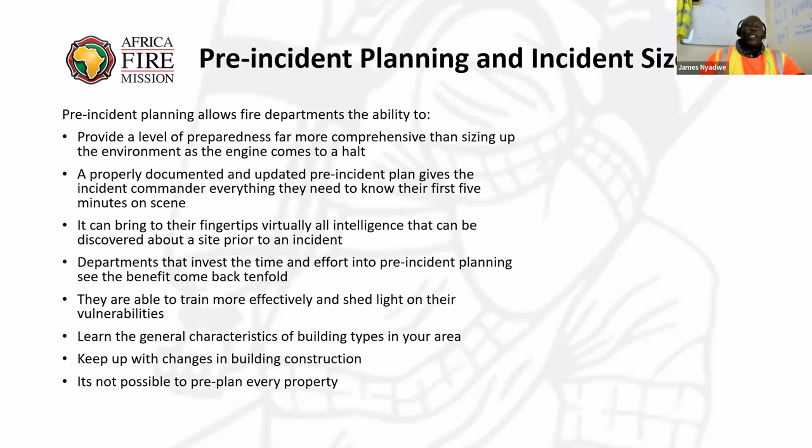After all is said and done, it's not possible to pre-plan every property. There's some you may never get to, but you may have buildings that are similar. So if you have buildings that are similar, you don't have to go to each and every building in that area. Of this type of building, we have this number, of this one we have this number. So it kind of gives you an idea. So I put there: just keep calm and do your scene size up.

Ultimately, valuable intelligence in a pre-incident plan empowers firefighters to make quicker and more impactful decisions that lead to better outcomes for everybody on the scene. It would be nice if you'd go to a scene, you don't lose any lives, and all your firefighters get back to the station in one piece. That would be the ultimate outcome. This can only be done if we are constantly learning new things, being proactive and going out there, not just waiting at the firehouse for a fire before we go out.

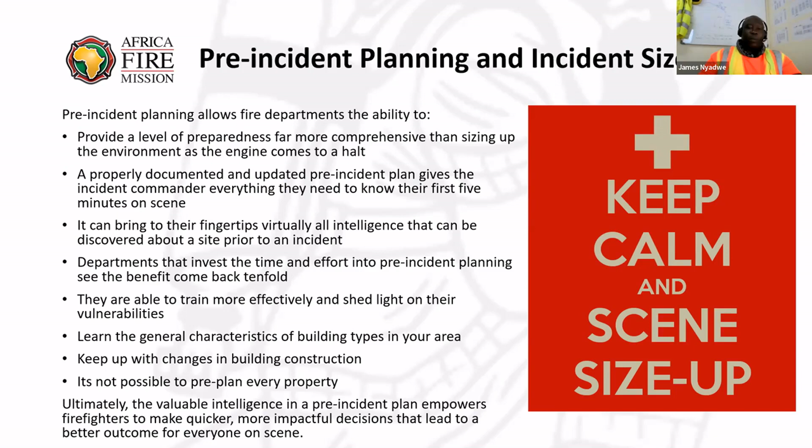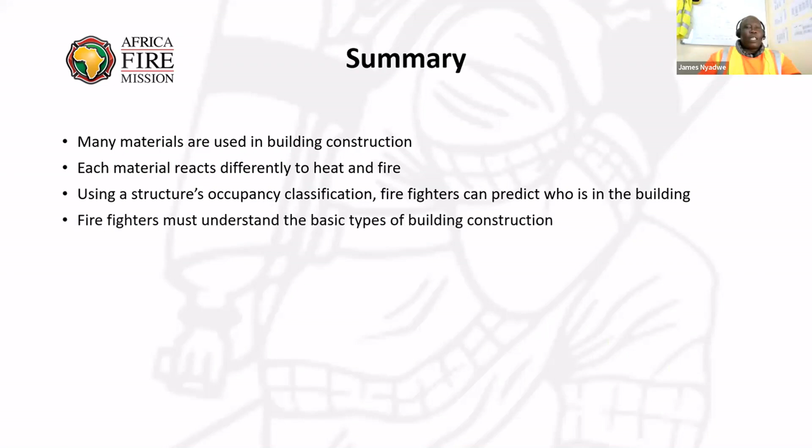So in summary, this is what we've looked at: the materials used in building construction, how each material reacts differently to heat and fire, and using a structure's occupancy classification, firefighters can predict who is in the building. We've also looked at why firefighters must understand the basic types of building construction, the 5 types of building construction, and how each has its own strengths and weaknesses and differing levels of resistance to fire.

We also realized that buildings contain a variety of parts and components. These can be made from different materials, and each one reacts differently to a fire. So we must take time to learn our area of operation to enable safety and ease of operations.

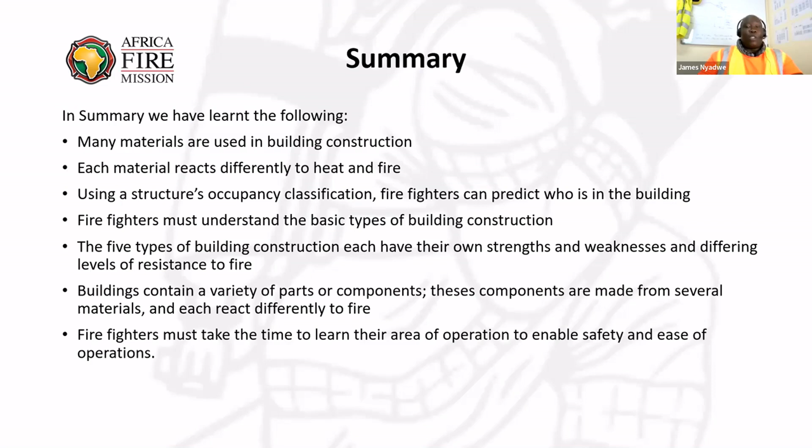Again, finally, stay alert, stay alive. Every firefighter's life matters as we are committed to the community. Just as we close, all the material I've used for this is available online, so on your own time you can go and do more research about it. It's available online and it's to our benefit to learn more about it. So thank you very much, and back to you, Mike.